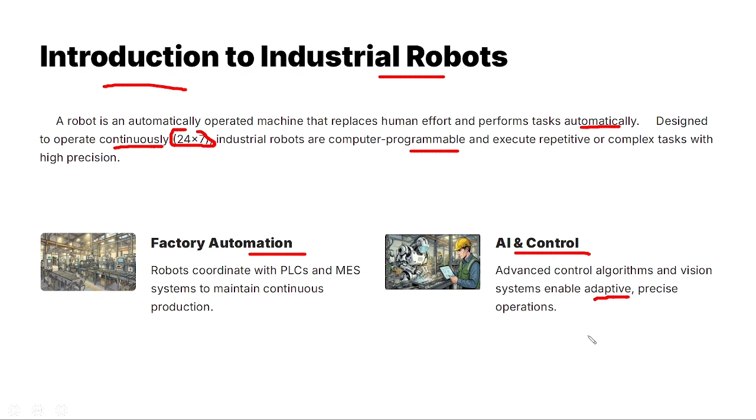Factory automation: robots coordinate with PLCs and MES systems to maintain continuous production. AI and control: advanced control algorithms and vision systems enable adaptive, precise operation. Features of industrial robots.

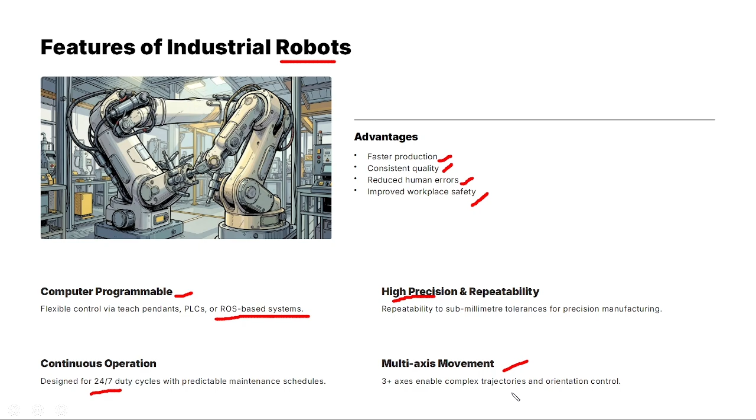High precision and repeatability, sub-millimeter tolerance for precision manufacturing, continuous operations like 24 by 7 duty cycle, multi-axis movement, trajectory and orientation control.

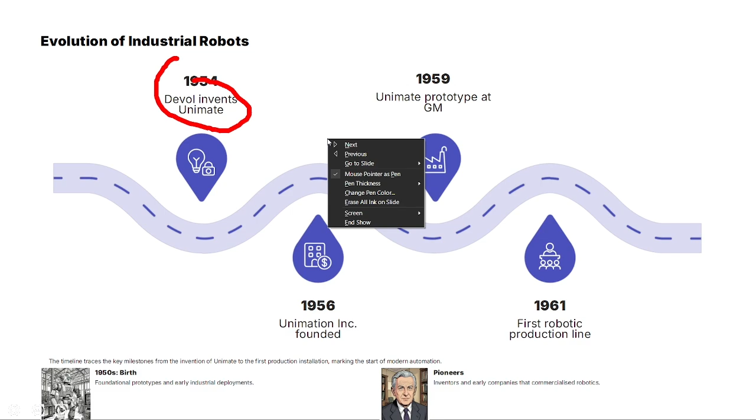Evolution of industrial robots. The history of industrial robots began in 1954 when George Devol invented the world's first industrial robot called Unimate.

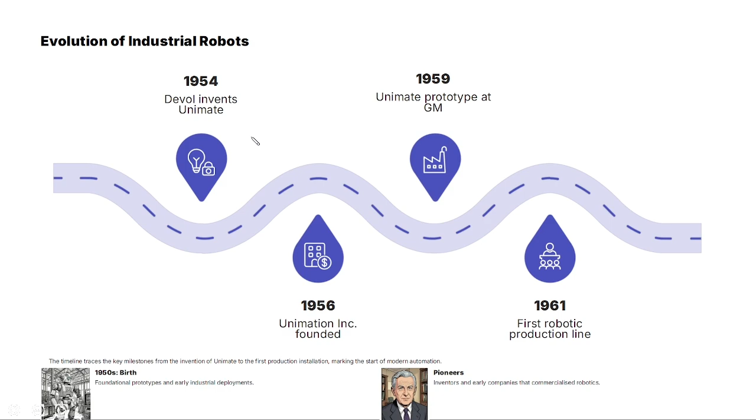In 1956, Unimation Inc. was established to commercialize the technology. The first prototype was introduced at General Motors in 1959, and by 1961 the world's first robotic production line was successfully installed. This marked the beginning of industrial automation.

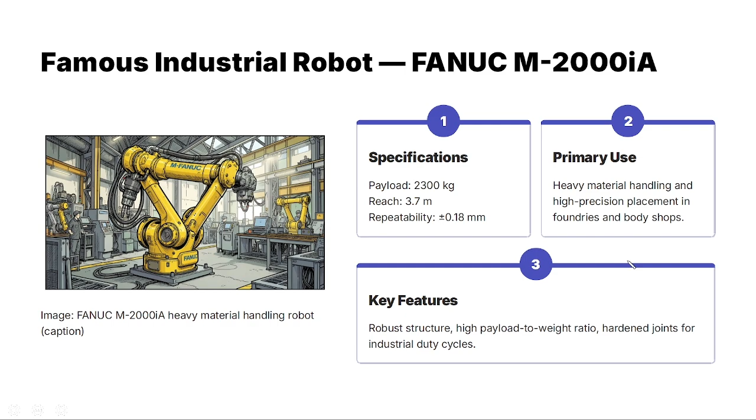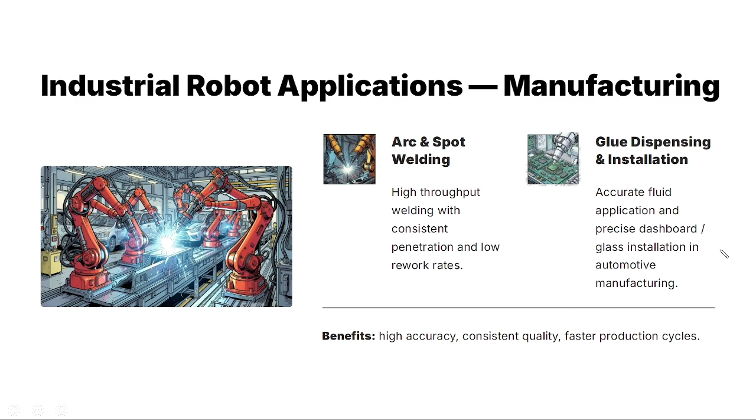Manufacturing applications. Industrial robots are widely used in manufacturing processes. Some common applications include arc welding, spot welding, glue dispensing, assembling operations, dashboard installations, and glass fitting in automobile manufacturing. These robots improve production speed, ensure consistent quality, and reduce human error.

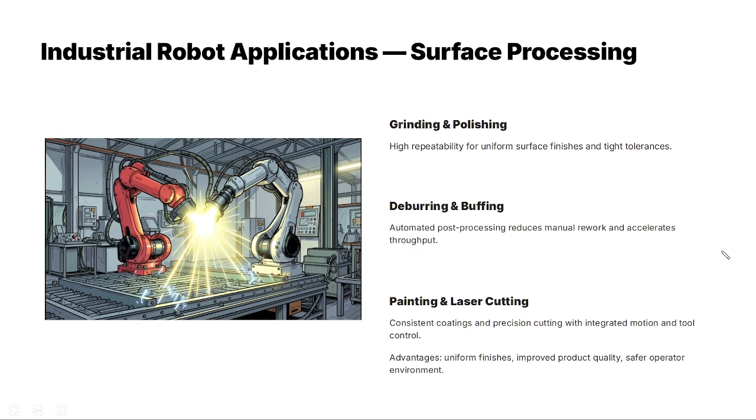Surface processing applications. Industrial robots also perform various surface finishing operations. These include grinding, polishing, deburring, buffing, laser cutting, and painting. Robots equipped with different tools can perform these tasks with excellent precision and maintain uniform quality across every product.

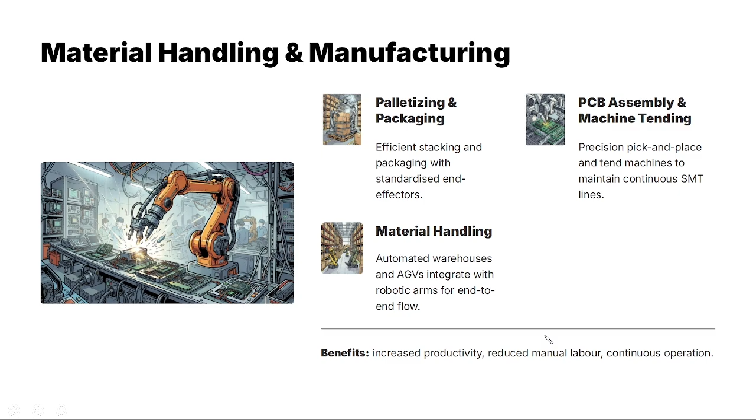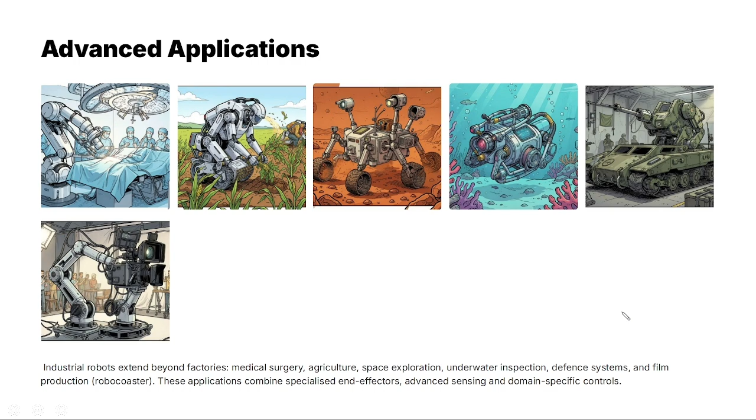Advanced applications. Today, industrial robots are not limited to factories. They are also used in medical surgery, hair transplantation, agriculture, space explorations, underwater research, defense, movie productions, and even entertainment rides like the Robocoaster. These advanced applications demonstrate how robotic technology is transforming many different industries.

To conclude, industrial robots have become an essential part of modern industries. They improve productivity, increase accuracy, reduce workplace hazards, and ensure high quality production. As technology continues to advance, industrial robots will play an even more important role in the future of manufacturing and Industry 4.0. Thank you.